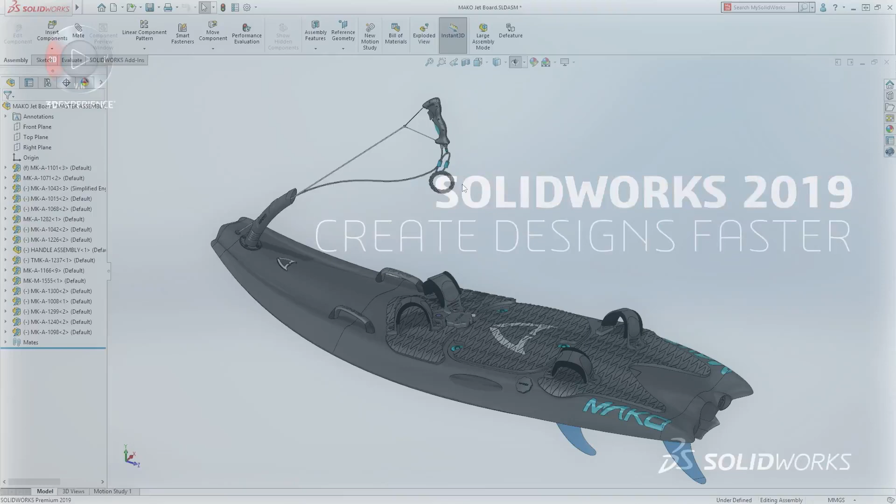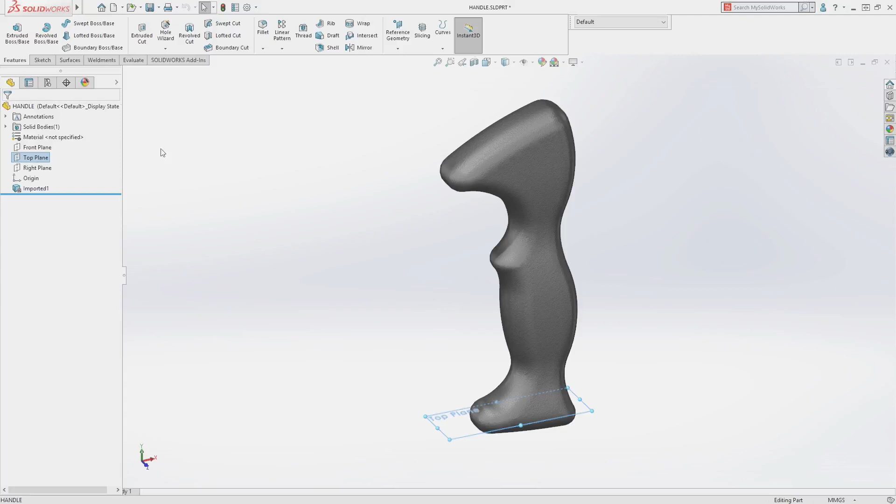SolidWorks 2019 introduces some great new tools for working with mesh geometry and some handy tools to speed productivity in assemblies. A common workflow for reverse engineering is to import mesh data and generate a solid model for production over the top of it. In SolidWorks 2019, a new slicing tool is available to generate 2D sections at the intersection of the selected geometry and a series of planes.

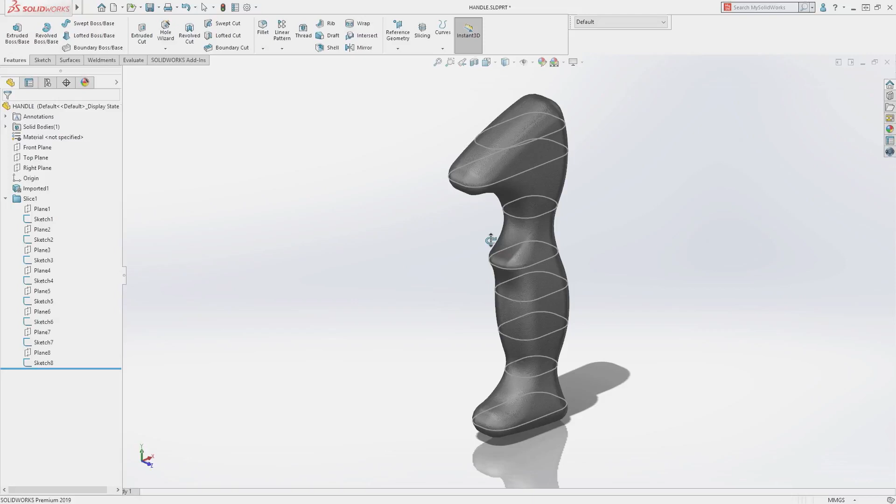Just define the number of slicing planes and the offset, and SolidWorks creates the planes and intersection sketches and conveniently places them in a folder. These sketches can be dynamically edited at any time for exact positioning and can be used like any other sketch to create geometry or referenced to define the lofts and surfaces required to build a solid model such as this handle.

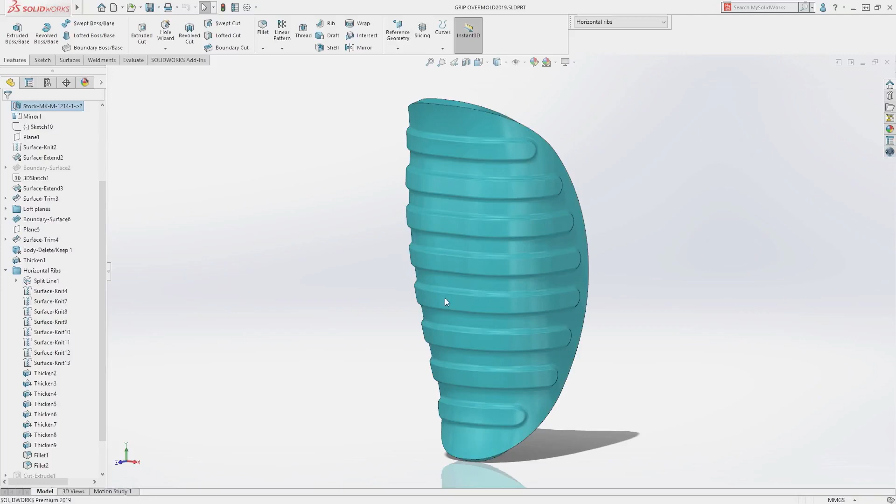Some designs, such as this grip, require textures or bumps which can be functional or just for aesthetic purposes. Textures can be time-consuming to model and require many features such as these ribs. SolidWorks 2019 introduces a new 3D texture tool which leverages an image to define a pattern of bumps. Here, several variations have been created using this new tool, including the Mako logo.

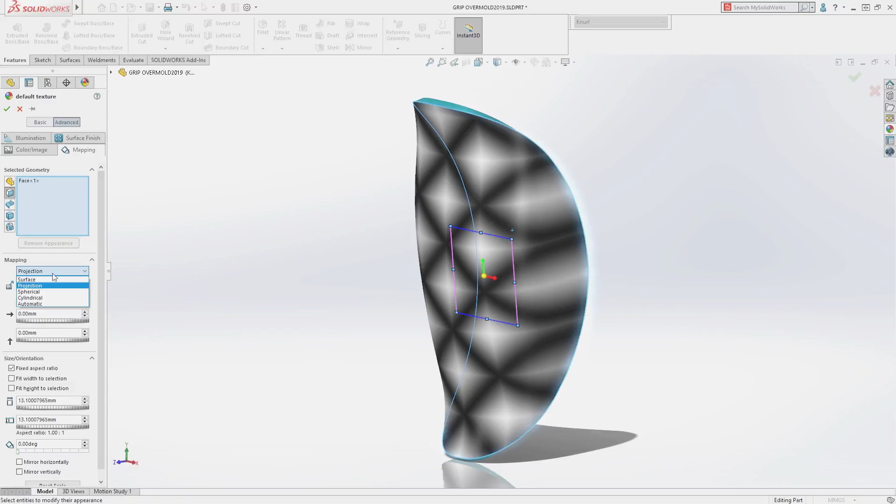These 3D textures are created by applying an appearance to a part or face, then size and orient it as required. The new 3D texture command can be used to turn that appearance into 3D geometry. The lighter the color and appearance, the farther the offset from the base face, and there are controls for mesh size and offset. SolidWorks then creates a mesh body that is ready for downstream processing or 3D printing.

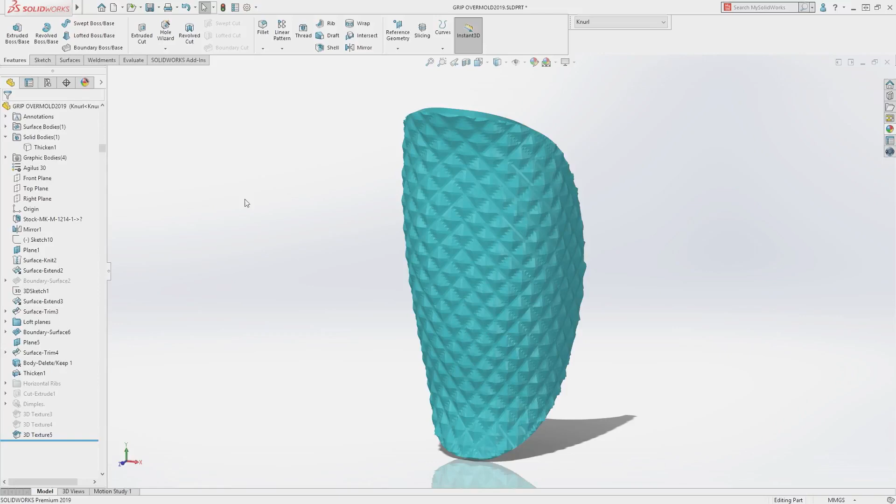Mates that are suppressed due to missing components are grouped, as well as inactive mates resulting from components being fixed at a later date. These can also be removed. Grouping mates by status makes it really easy to find and clean up the mates in your assembly.

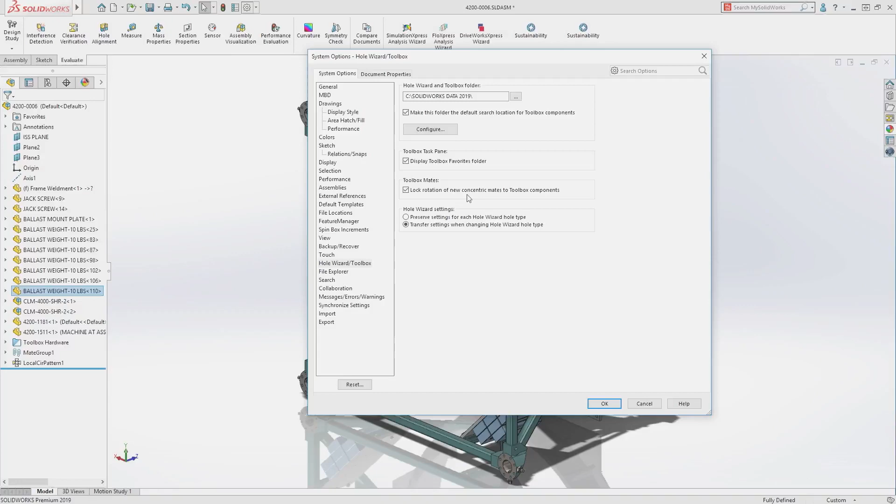These are just a few of the new enhancements for SolidWorks 2019. The new tools for working with mesh geometry and assembly productivity tools are sure to increase your efficiency and speed the time to complete your projects.